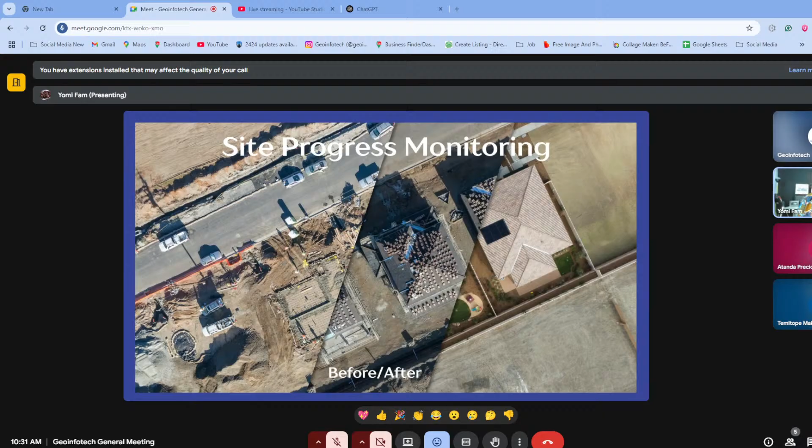What we were doing last week, this is what we're doing today. Oh shit, where did it stop? It's just showing a video of 46 minutes 46 seconds. We are live back, if so we know we can start. Why did it stop? Unavailable?

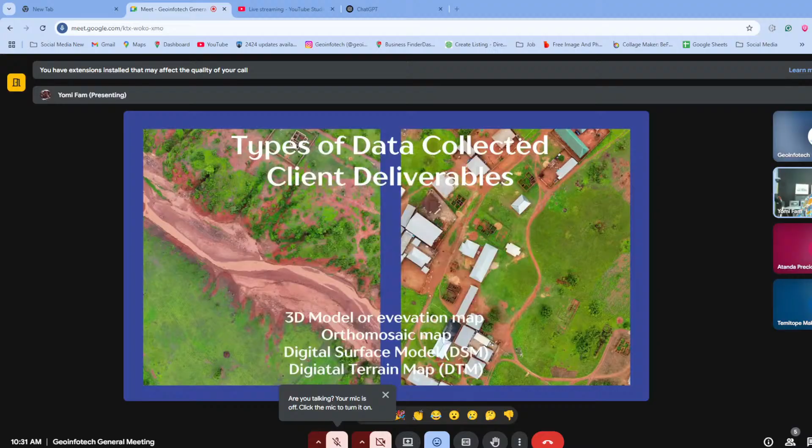What should we do? I think you should just maybe answer. Can you hear me? Maybe we can start from the beginning. Can you hear me? Shut up. Maybe what we're going to do first is first.

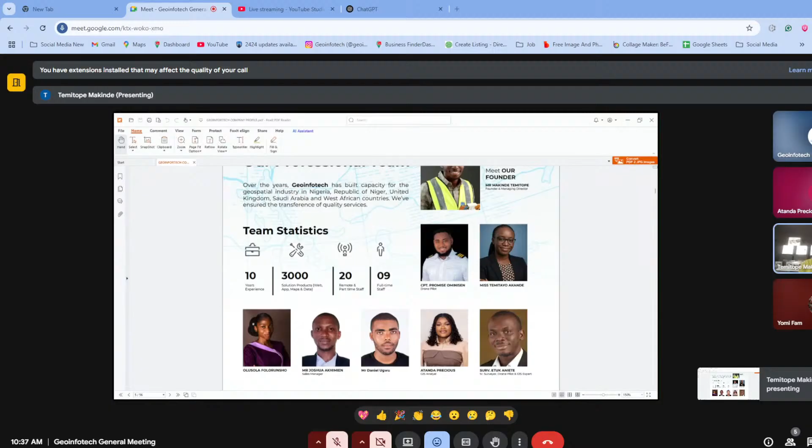So what we'll be diving into is drone data in the mining sector and also in the construction sector. As we all know, Geoinfotech Resources Limited, we are in Nigeria, Lagos, and Abuja. One of our core responsibilities is providing quality services in every one of our sectors, and we also offer services in different sectors, like in the drone surveying sector, in the mining sector, in the agricultural sector, in the real estate sector, urban planning, all different sectors.

I'll just use this opportunity to introduce Geoinfotech to you as an industry leader in this sector, in the geospatial and drone technology deployment. We provide state-of-the-art solutions with drone technology, geodatabase for several agencies, satellite data acquisition, and modeling of drone data and bathymetry data sets. And we provide a broad range of high-level geographic information system and remote sensing services.

Some of our prominent and prestigious clients are here with us also. I believe we will also have you with us and get to know more about you, and you get to know more about us in this webinar. In this webinar, we'll be diving into a lot of stuff that you're going to be learning. I'm going to put you through some of the things you're going to learn from us in this sector.

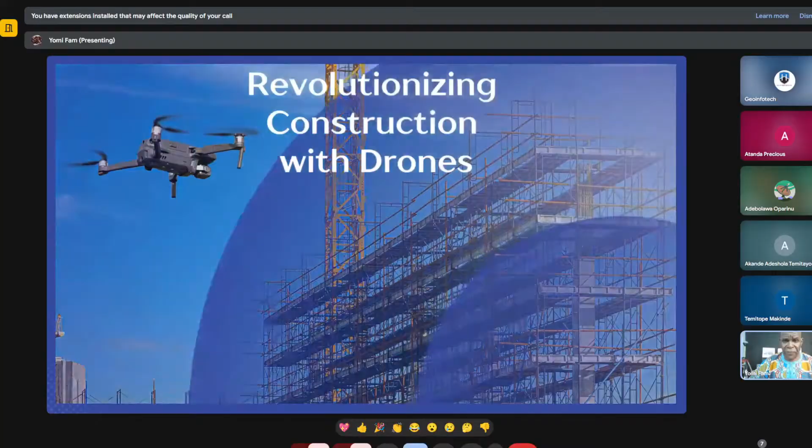Okay, so basically here we have a slide of someone sitting in his office with a cup of coffee and what looks like a pastry. So what if you could inspect your entire site without stepping foot on it? That's every investor's dream, or every site manager's dream. Sit back, the drone flight is being sent to you live, and you can just basically see what's going on site.

So what kind of challenges do we face in construction in Nigeria? Very limited visibility of site progress. There are always delays, most times there are delays and cost overruns. There's safety risks on site, there's difficulty tracking material usage. Drones can help fix all this, and we'll be going over a few of those challenges and see where the drones can actually come in and help out.

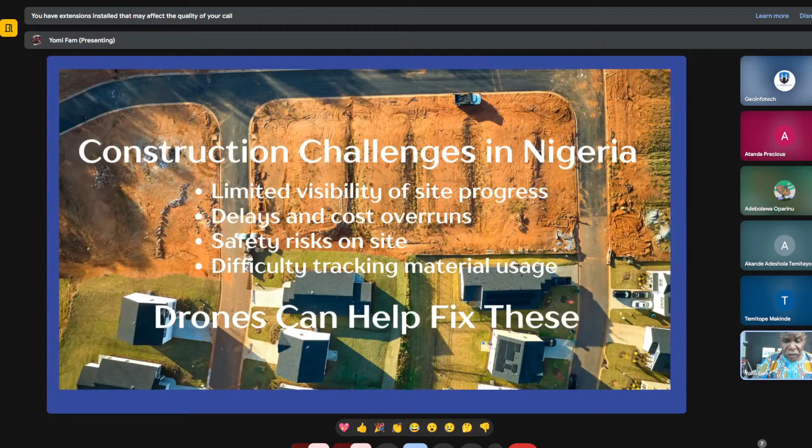Drones are basically your eyes in the sky. What are drones? Drones are also known as UAVs, unmanned aerial vehicles. They capture high-resolution images and videos. They fly autonomously or manually. What I mean by autonomously is you sit in your office, using apps like DroneDeploy or Pix4D, map your mission, preview it before you get to the site. Get to the site, put your drone up in the air, and the drone will automatically or autonomously fly the mission for you.

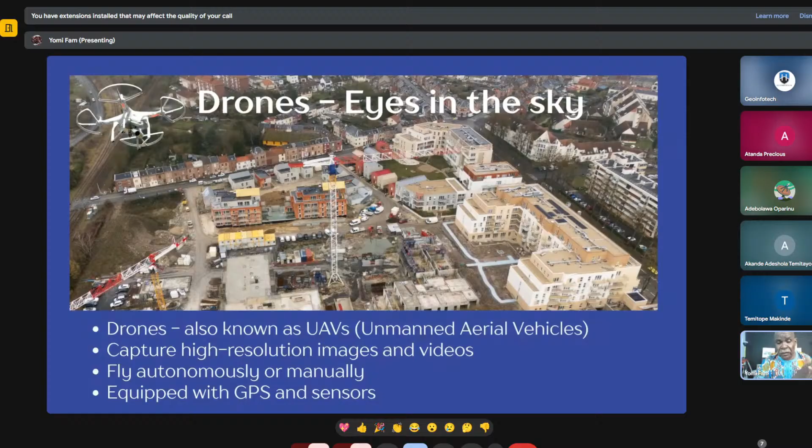But having said that, it's also very important that you manually know how to fly a drone, just in case when you get to the site things change and your autonomous mission plan missed a few shots. So while you're on site, you can go back and capture shots of those images that were missed, that's where the manual thing comes into play. Drones are equipped with GPS and highly sensitive sensors.

Drones are basically your eyes in the sky. I don't know how else you can get a view from that high out.

Where do drones fit in the construction site life cycle? You can have daily, weekly, and monthly site monitoring. You can do topographic surveys. You can take progress photos and generate 3D models. You can do site surveying and planning.

You can monitor the progress on the site as construction goes on, and do material management. What do I mean by material management? Basically, on the site, one of your contractors says he delivered 10 truckloads of gravel or sand, but he only delivered 9, or each truck wasn't full.

It was like 90% full. Well, the drone is up there. You just have to make sure that when he delivers the gravel or the sand, the drone's taking a picture of what's being delivered. You could also take stockpiles after he's dropped off the commodity on the site.

You could also do centimeter precision measurements of, okay, this pile here yesterday was what, 2 tons worth of material. Today, something's been used, it's now 1.5. You can do that kind of material monitoring, watching what's going on the site.

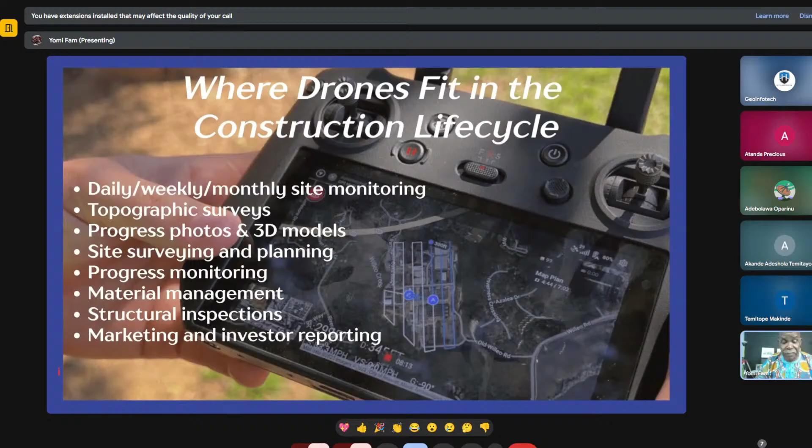You could also use the shots and deliverables to show the investors, okay, we said in 2 weeks' time we're going to get to stage B of the plan or the building, and you could show the investor, yes, we're on time. And if you're not on time, you could always explain to the investor why.

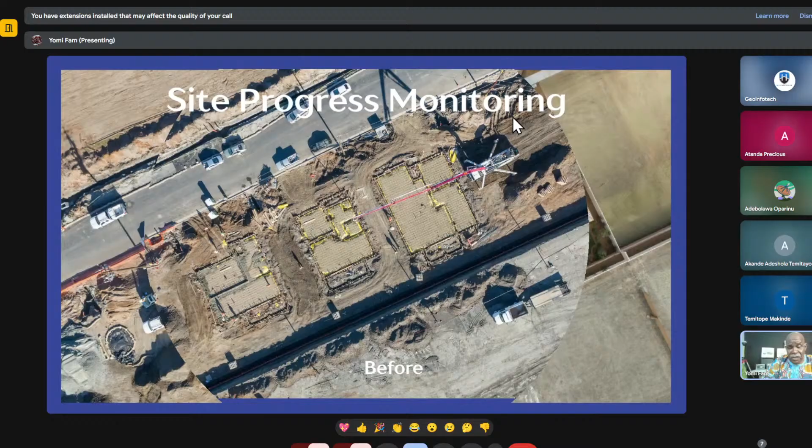One important thing you could do is site progress monitoring. As you can see on the slide, this is a drone taking a shot of, looks like the foundation has been laid. This is a before picture that you can show your team or the investor or whoever needs to see what's going on site.

You could also use the pictures and put them side to side, showing the before and where you're at in the construction stage. It comes in very handy.

Okay, 2 weeks ago, you had the left half of the construction. 2 weeks later, you're here. So it gives everybody peace of mind that the site manager or architect or structural engineer is following through on what they promised.

Next, why use drones in construction? Key benefits: speed, safety, and accuracy. You get faster and more accurate surveys, improved safety monitoring, visual reporting for clients, and lower labor and inspection costs. Very important for investors. If you can lower your labor cost and your inspection costs, so be it.

Now, I know for a fact that sometimes with these really large projects, maybe the owner of the building hasn't come out of pocket himself, meaning maybe he's gone to a bank to get a loan. Now most times, maybe not so much in Nigeria, the money is released in tranches. In other words, one week you say you're going to do X, Y, Z on the site, and they will not release more money to you until you prove that you've completed that first part.

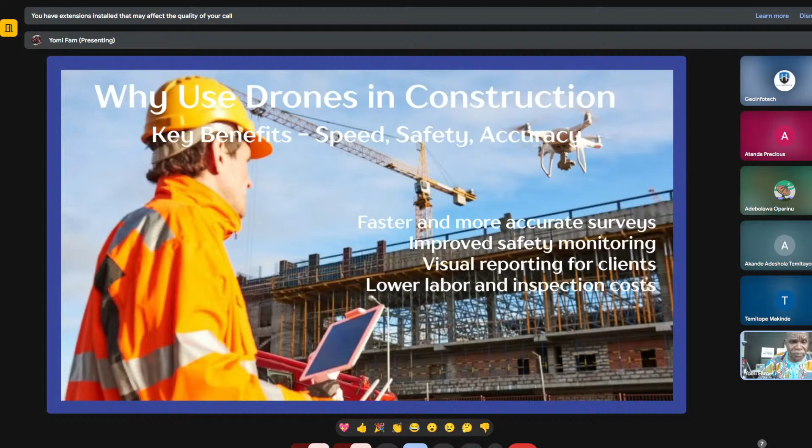Next slide, benefits of drone surveys. I'm just going to read through the list, they're pretty self-explanatory. They are completed by professional building surveyors who are trained in building pathology. They capture detailed imagery of otherwise inaccessible locations. You get closer to the survey target, which improves the quality and density of scan. Completion is faster due to ease of access. They reduce health and safety risks.

Very important, no plant shutdowns are required for a drone survey. Most of the drones, although sometimes you have to get permission from the client and let them know you're going to be flying your drone over people. But the law does say that as long as you don't have a sustained flight over people, you're good to go. You could do that while people are working, as long as they give you permission and let them know what you're doing. They provide a more thorough overview of a site, don't need any explanation there. They are more cost-effective than traditional surveys, definitely.

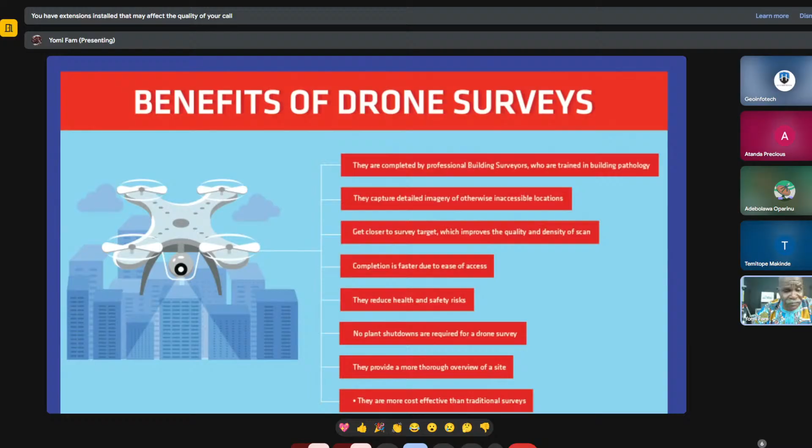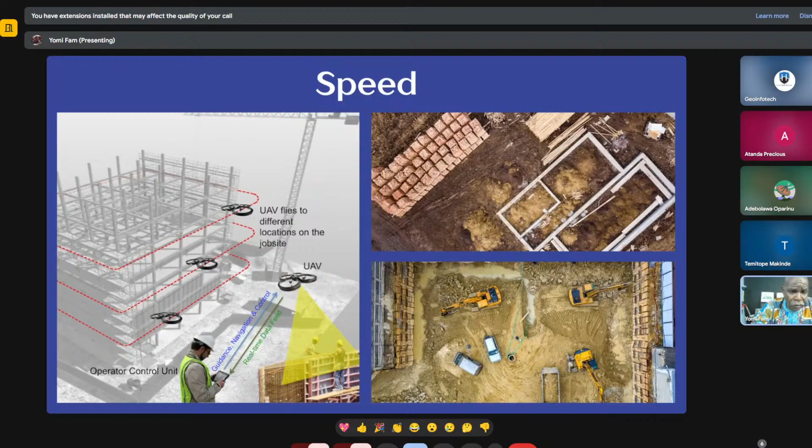Next slide shows speed. On the left-hand side we see a picture of a drone going around a building. At the bottom of that slide you have the operator with a remote controller. Whatever he's looking at, he's watching exactly what the drone is doing. He uses the controller to guide the drone if he's flying manually, or autonomously. If he's flying manually, that's when he takes more control of whatever the drone is doing. The drone in real time is feeding him data, so he can see exactly what the drone is doing. On the right-hand side, it's basically looking up from the sky, or from a drone, at what's going on at a site.

Here we go, safety, big issue. Now on most of these sites you've got to have your hard hat on, got to be wearing one of these funny looking jackets, got to have your safety boots on, because God forbid there could be accidents on site. If you have a drone up there taking shots as the construction goes on, you can see everybody on site has a hard hat on, which is very important. If someone falls, or a brick falls on someone, at least you're covered in the sense that all my workers are well equipped, they're covered, wearing the right safety gear.

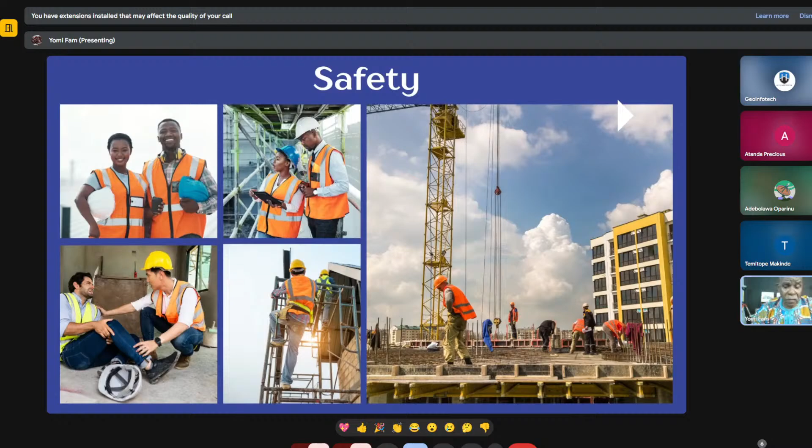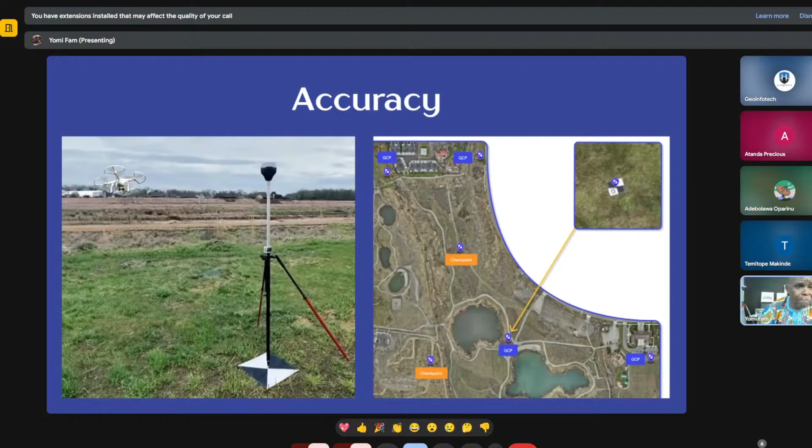There we are. Now, this is what they did on Niger State. They took all these maps, put it into the right processing software, and came up with this, which is going to be submitted to the authorities so that when they're planning in the future... a lot of homes got damaged, a lot of homes and lives were lost. So the authorities or whoever's going to develop this place can now take these maps and say, okay, water flows this way, this is where we're going to do our design, or this is how we're going to design the site in the future.

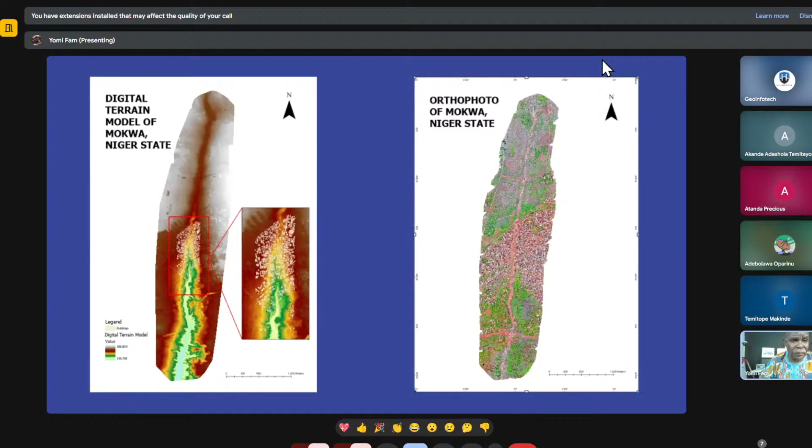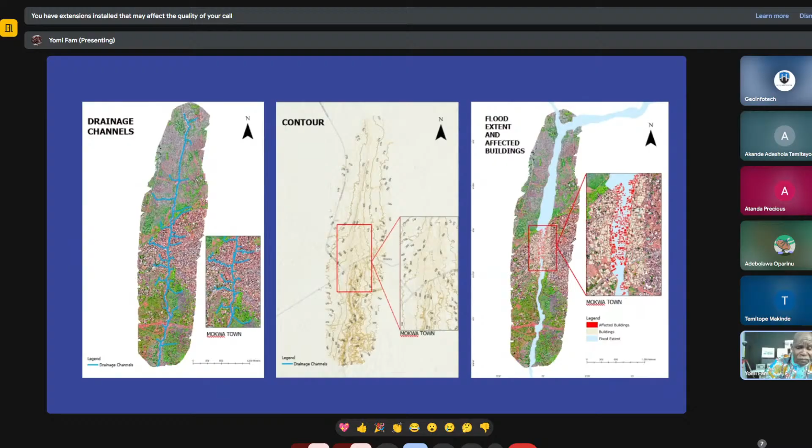Mostly contour maps are for surveyors. It just shows different elevations. Again, what GeoInfotech did on the right-hand side is they showed basically all the buildings that were affected by the floods.

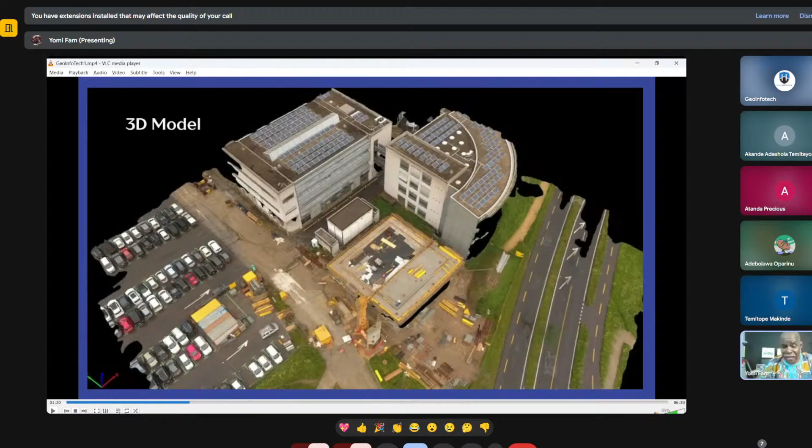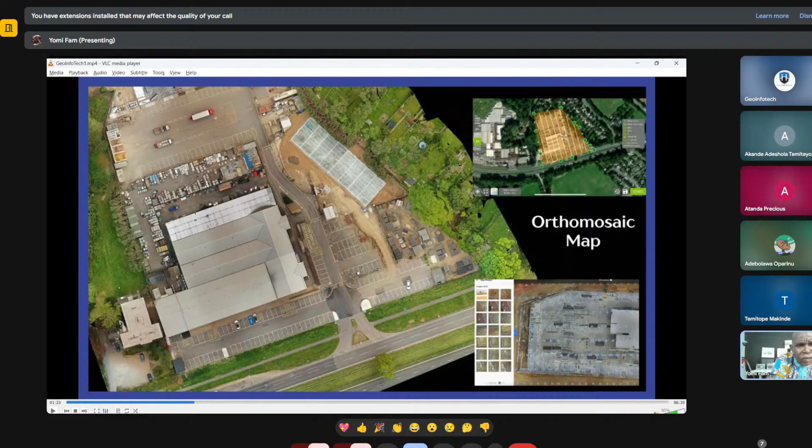If you look at the bottom corner, no, let's go to the top. The top part of the slide shows the mission plan. Again, I think I've spoken to you about what a mission plan is. The bottom right shows where all the photos were taken. Those little blue dots are where images were captured by the drone.

At the end of the day, depending on how detailed your client wants your orthomosaic map to be, you're going to get several photos like the ones on the left. The ones GeoInfotech did a couple of weeks ago for the Niger State, they did in excess of 400 photos, and all those photos had to be stitched together, and that's how they were able to come up with their maps.

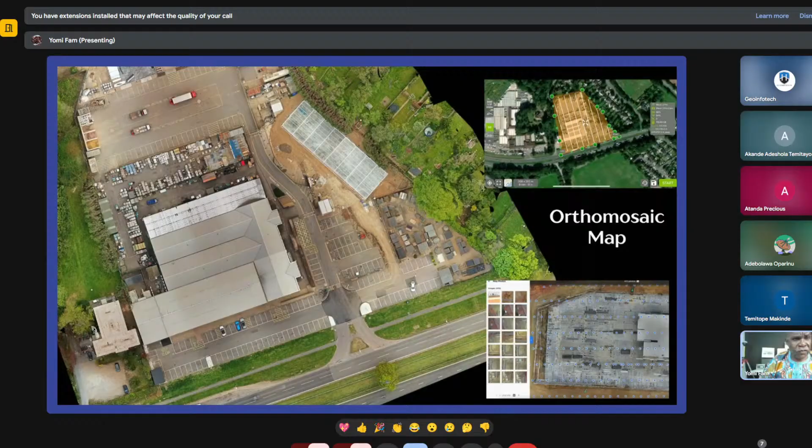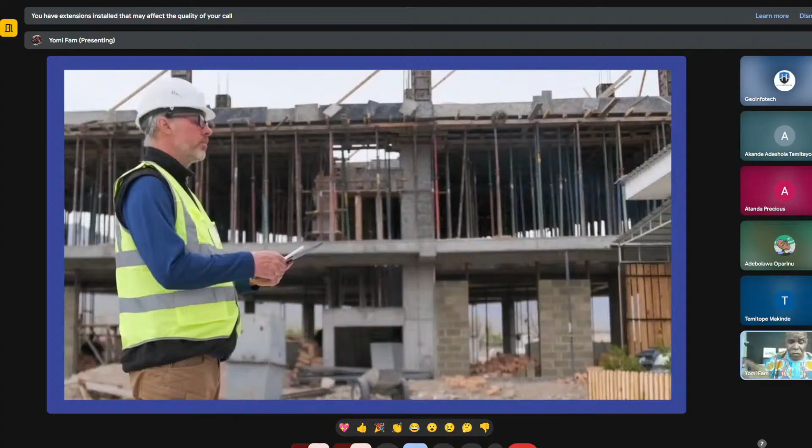So basically, this picture here practically doesn't have anything to do with drones, but just watch. This is a guy on the site, and what is he doing? He's taking notes, old school guy taking notes. But watch his face at the end of the clip, that doesn't look like somebody that's too happy about what he's doing. I am yet to find a drone pilot that doesn't have a smile on his face, because it's not easy work, but it's enjoyable because you can actually see the fruit of your labor. This guy here, oh no, I won't want him to be my site manager.

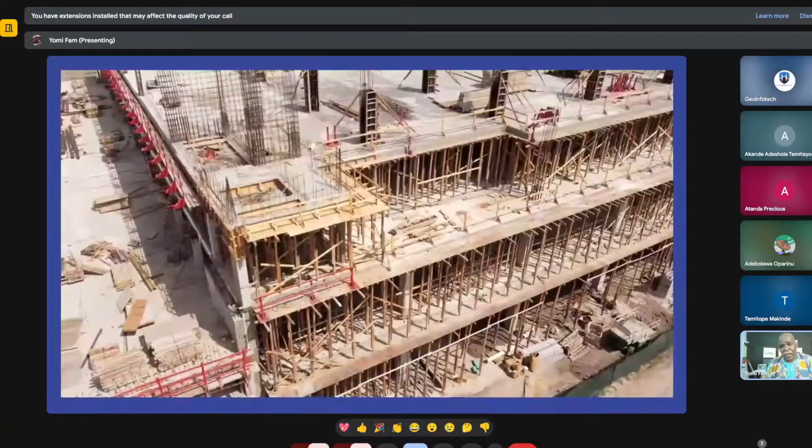So moving right along, basically we're just showing drone shots of construction sites. Now, I don't expect all your sites to be this large, but who knows? With GeoInfotech behind you, that's bingo, you can do everything.

This is a site from, here you practically see sand or gravel or sand piles. Now, if you're using the GCPs, or you're using the RTK drones with the RTK modules on them, you can actually take stockpiles of all that stuff there. So your site manager says, oh man, we're running out of sand, or we used up half of the sand that we need for the site. You can always go back to some of the progress reports or some of the progress pictures that were taken when this stuff was delivered.

One week later, there's only 50% left. What exactly did you do with the 50% of the stuff that you claim you used? Those kind of questions.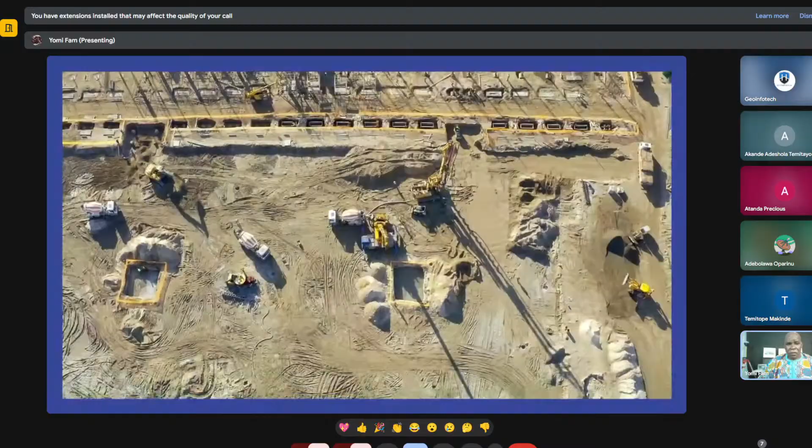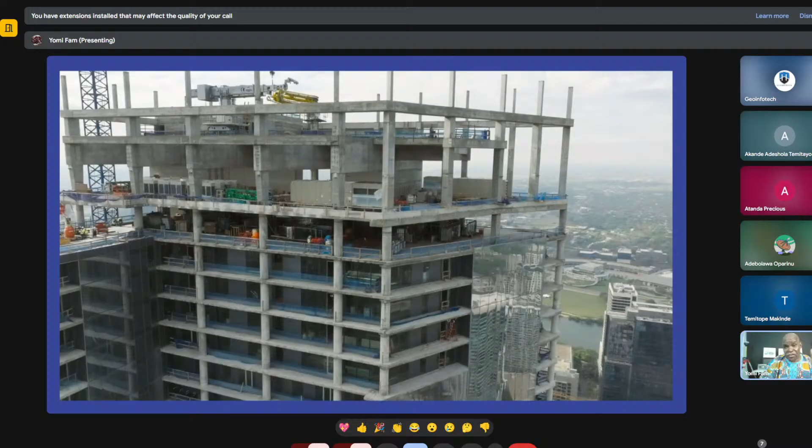So that's basically showing what's on site, the pre-construction. They've already started laying out some slabs here. This is another big one. I don't know if you could imagine monitoring a site like this, having individuals, I don't know how you would do it. Well, you might have to, if your company is rich enough, get a helicopter to take these shots. But basically, with drones, you could do anything. It's basically zooming in and going around and showing you what's going on.

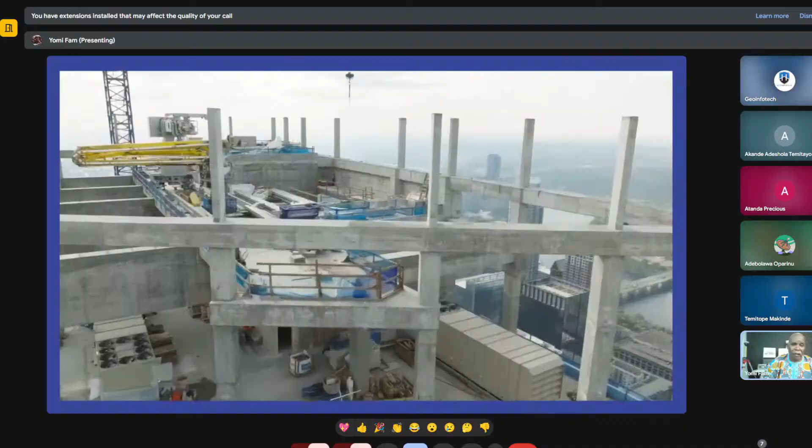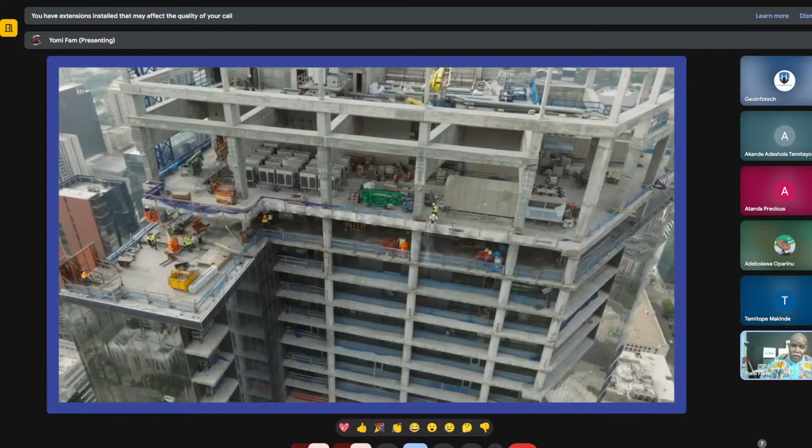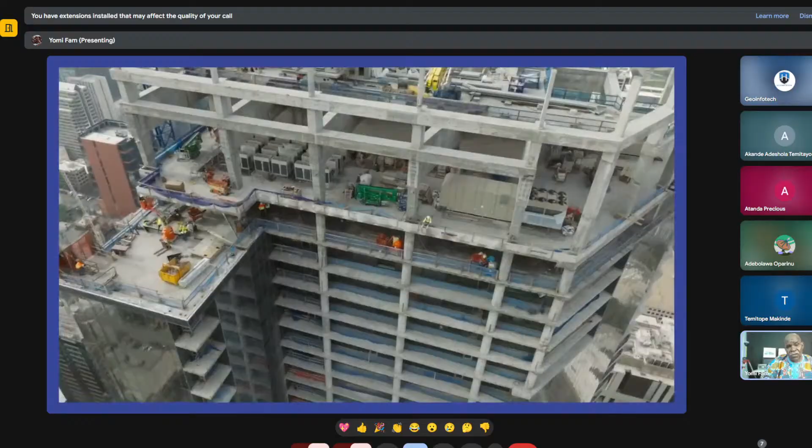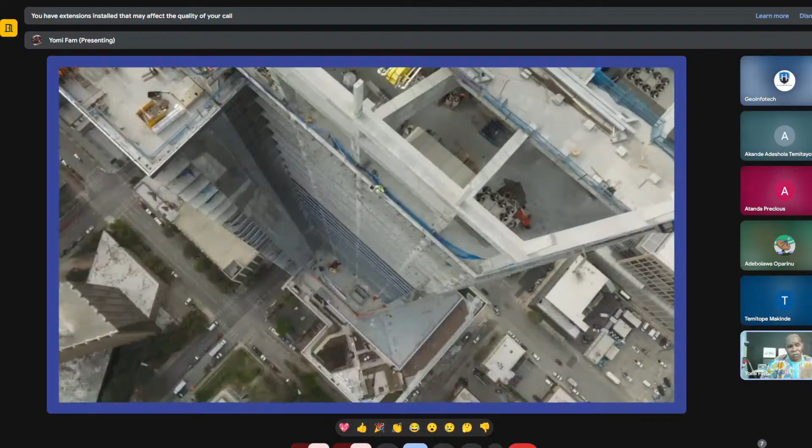Isn't that a beautiful shot of what these drones do? Here you can see what's going on. We're taking shots of the exteriors of these construction sites. If you need to see what's going on inside, we could also do that at GeoInfotech. Lots of drone pilots only take shots of the outside of the building. We can also take shots of the inside, so you can make sure the pillars or columns or whatever structural stuff is placed right, the right width, and check that the AC units are placed right.

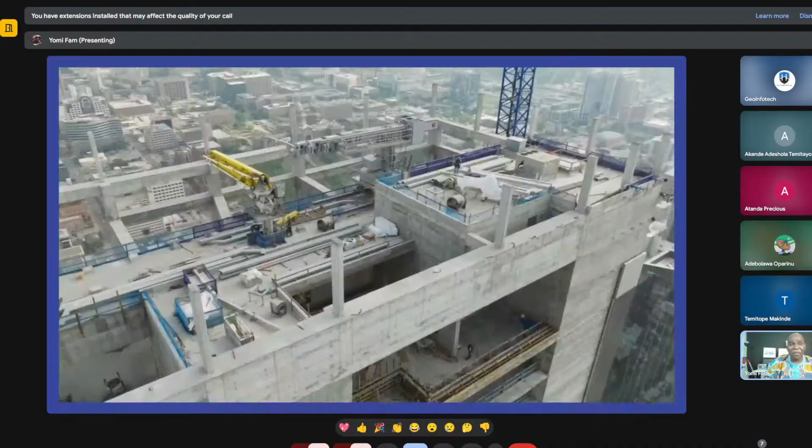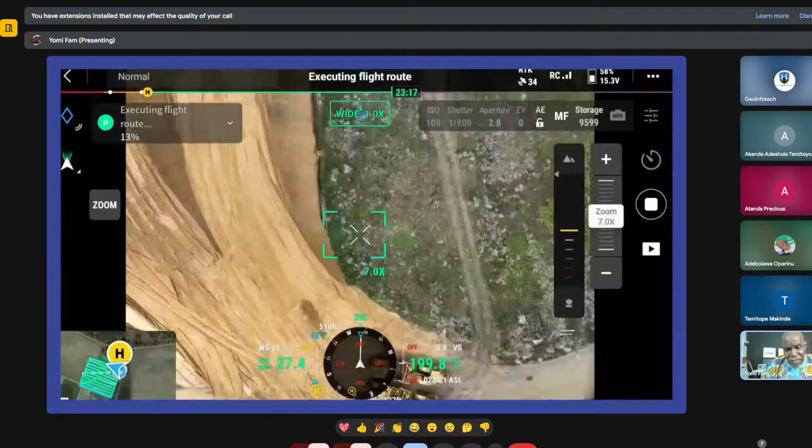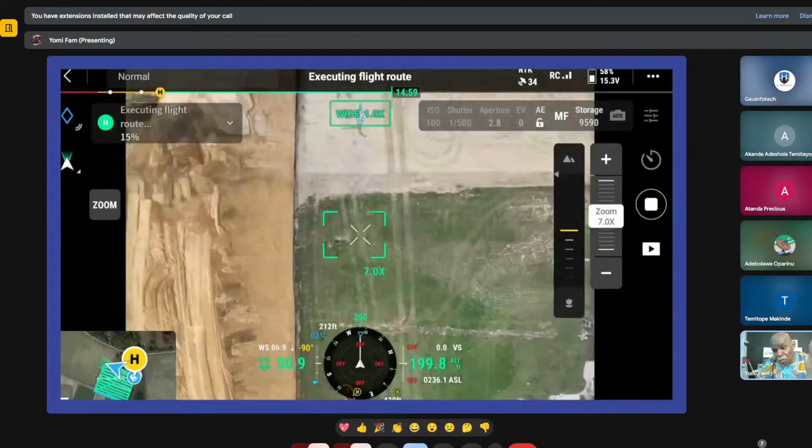This is a site, and I left the audio on this one because you can hear those clicking sounds. That's the drone taking pictures at precisely predetermined spots on the site. If you look at the bottom left corner, that's one of those mission maps you've already pre-planned. So you get out to the site, put the drone in the air, and watch what happens at the bottom left. The drone is taking pictures maybe every 1 second. As the drone turns, you see it's still following the pre-planned map and taking pictures along the way.

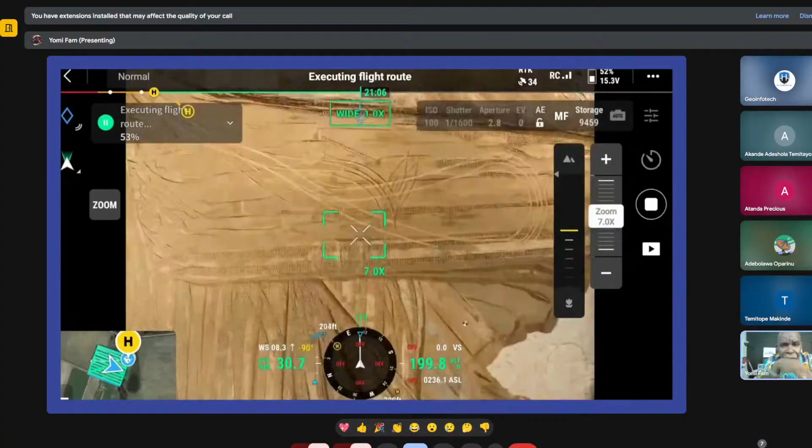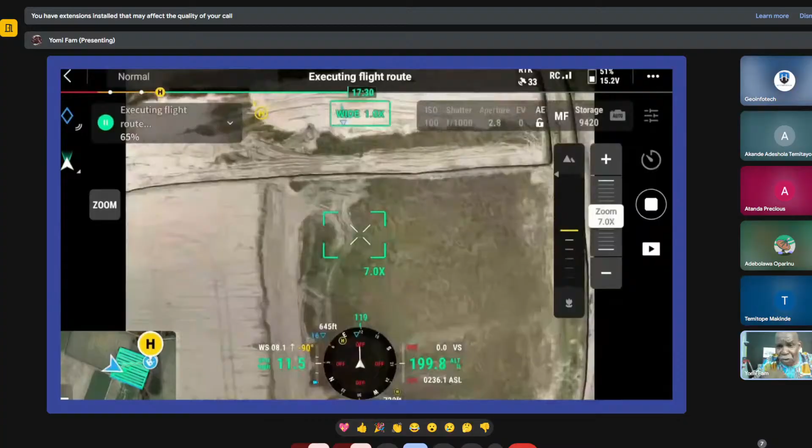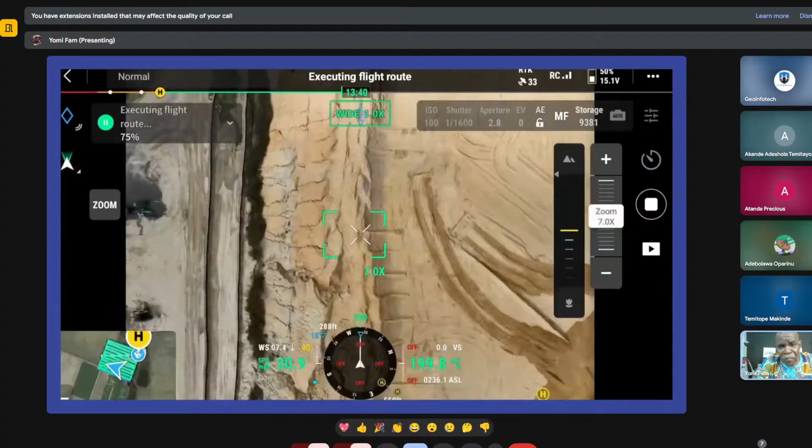I'm not going to finish all of this site, but as you can see, this software shows you how much of the pre-planned map it's completed. Right now it's at 57, 58%. So you can control everything going on in your data capture software. I fast forwarded it a bit so I didn't bore you with the whole 100%. We're at 66, it should be coming to a close. Look around the screen and you can see all the settings you preset on the drone, and as it moves, it's taking more pictures. I take my pictures every 2 seconds, but it's up to you - if you want to create 1,000 photos, that's up to you.

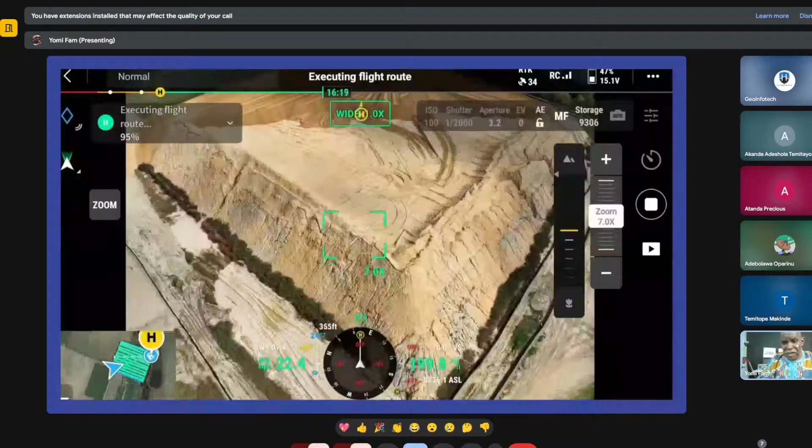I'm going to be rounding up in a minute, so I'll fast forward this a bit. We're almost done, we're almost there, it's coming to a close. We're at 95%, and at the end of the mission let's see what happens. 97, 98, 99. It's going to say something.

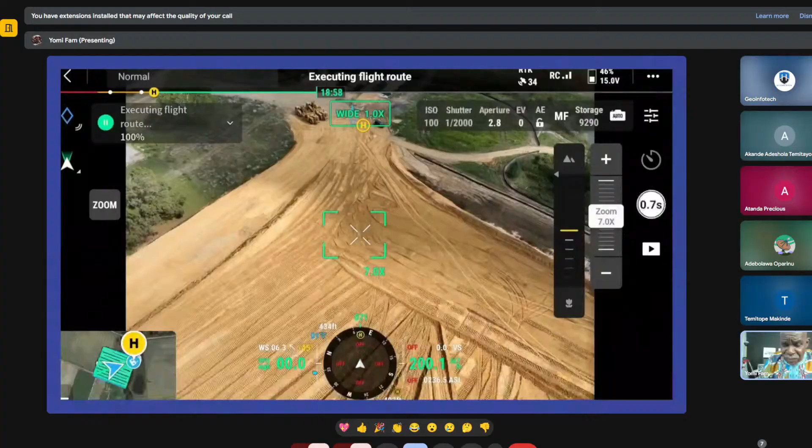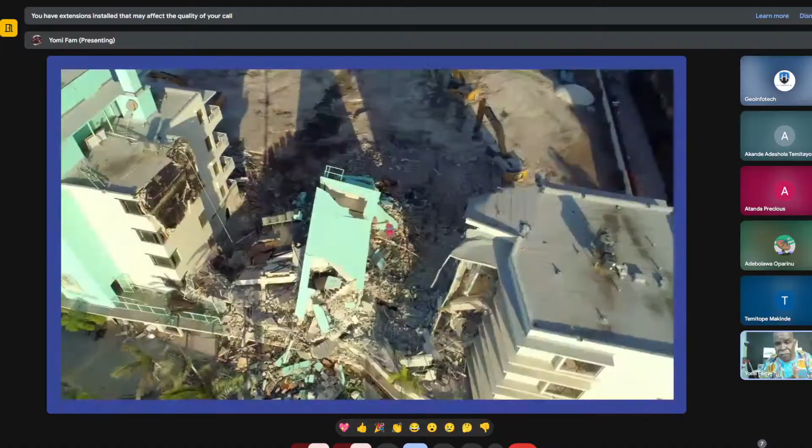There you go. Here is a site in California that was damaged by earthquake. They want to rebuild, and at the back of this collapsed building they want to put on some other structure. So your drones can go out there, determine what the damage was, and then report back to the developer on the extent of the damage. That's right by the ocean.

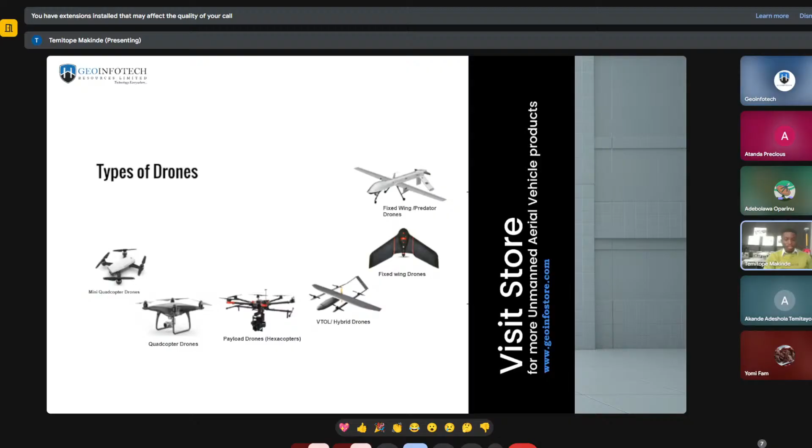And most importantly, we have the fixed wing drone, majorly used for long endurance surveys. You want to survey an entire site for like 2 hours, 1 hour, because it has only one rotor, while the quadcopter has about 4 rotors, so it exhausts the battery faster. Then we have drone and the sensor - this is where a lot of drones are used for different purposes, for different missions. We have the electro-optical camera, for high resolution visual. And we have the infrared, for heat signature. There was a time we were surveying a site just to detect areas that had a high level of heat signature.

You can't use that with the RGB, with normal photogrammetry we use. You need a different payload for that.

Then we have the multispectral sensor, although this is very good with agriculture areas, whereby you can check the health of the crop.

Then we have hyperspectral sensor. Hyperspectral sensor is not common, a lot of us don't really see that in markets. It provides spectral data for mineral identification, and this is some of the things we'll be diving into.

And we have LiDAR. LiDAR is best for detailed mapping, especially where we have forested environments, so that you can get the bare earth surface while you still have tree and vegetation cover at that area.

And we have synthetic aperture radar. This is majorly for rain, fog, and vegetation of wide area imaging.

They have GNSS. This is also a system embedded with the drone to ensure precision while capturing your data, so you don't have to capture data without precision. As you're capturing your data with the GNSS receiver, it gives you more accuracy to your data set.

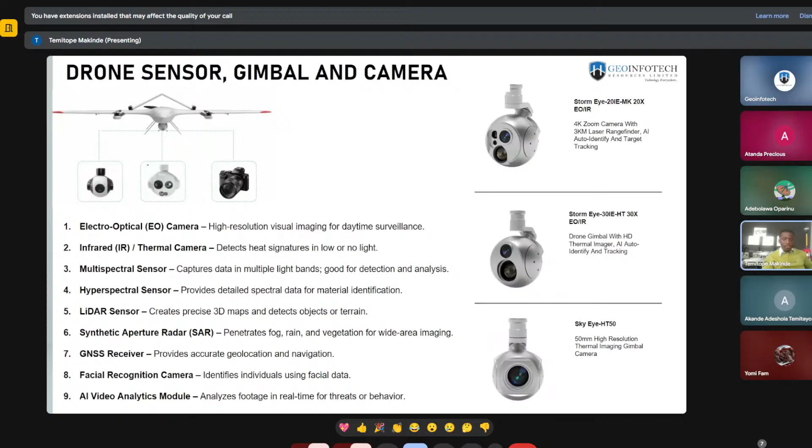And we have the AI video analytics module. We've recently seen it in the Matrix 40, which is bringing an AI system into the drone, whereby it makes the drone smarter. A lot of people are doing a lot of AI stuff, and this will actually increase the value of this hardware itself.

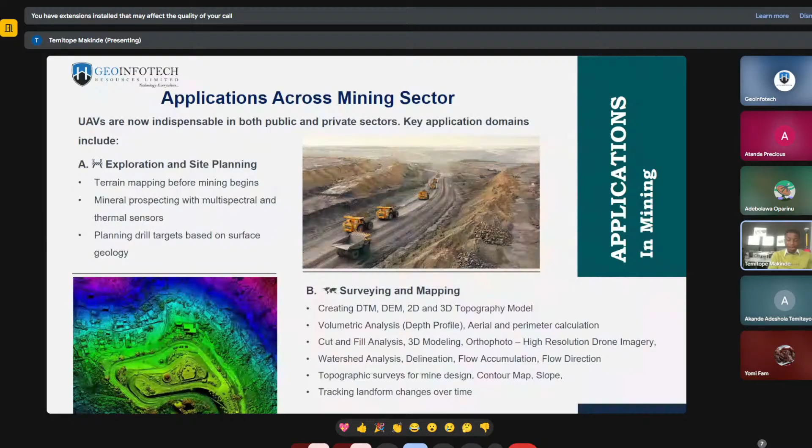Watershed analysis helps you understand the areas where water will flow to and where water will accumulate before planning a lot of things. So with this, you can understand the nature of that environment, make advantage of this nature, and also plan accordingly. You can also track landform changes over time.

Now we have stockpile and inventory management. This is one common part within the mining sector. You can see here we have previous data and previous calculations whereby we brought in past projects, processed these data sets, analyzed them, and calculated the volume of this pet coke you can see there. Pet coke is one of the raw materials commonly used for cement, and it's more like a waste product of petroleum. This is pet coke, and they use it in combination with other minerals to get other results.

So you can see here, without going to the field again or spending hours of time, just this data set can give you a lot of information, and you can see the analysis calculating the volume of these data sets. So you can measure stockpile volume accurately and frequently.

With this, you can know how much volume is remaining in stock, and know if you've not been cheated in the office. You can calculate this with just a simple tool like Pix4D. You can track inventory levels and reports, and also compare with logistics as well.

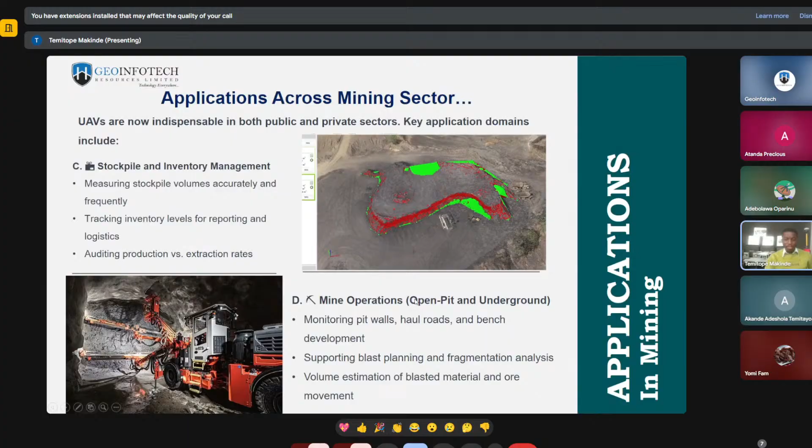Then we have mine operations. One thing about mine operations, especially underground, is that it has a high intensity for risk.

You can send a drone to survey the entire mine and also create a 3D model to understand the terrain before going in there. This allows you to monitor the pit walls, haul roads, and bench development. You can also support blast planning and fragmentation analysis, and calculate the volume estimation of blast materials and ore movements.

The next thing we have here is stockpile and inventory management. It's related to what we did before. You can use this for calculation of different inventory levels and also for auditing reports within the organization.

The next one is environmental monitoring and waste management. With this, you can inspect different cracks, seepage, and deformation, or monitor rehabilitation efforts and vegetation growth on site, and also study the water quality within that site.

A lot of things this drone can do for you without you being in physical contact with it. One important thing you'll notice is that you can get results equivalent to about 15 surveyors or 15 GIS field workers on site using just a drone.

Anytime you're flying a drone, you just need a co-pilot and a person in command, that's the main pilot, or the visual observer. You have a visual observer, a person in command who is the pilot, and maybe a person manipulating the control. So you have 3 guys capturing detailed information on site, and this is transformed into a digital copy or digital dataset that can be used for multiple results.

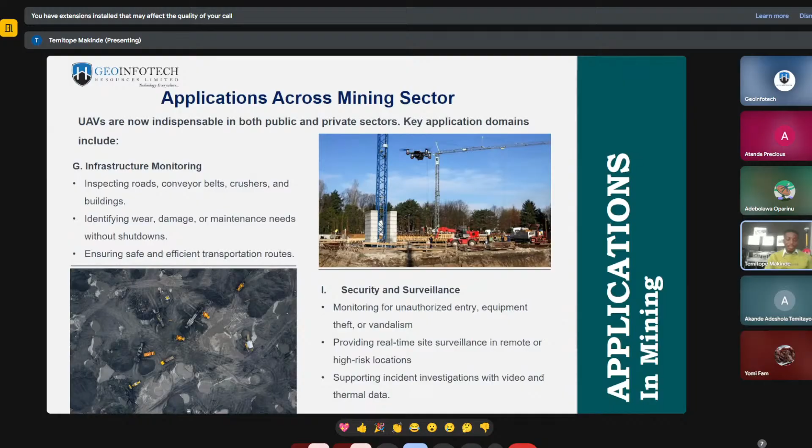We have a lot of drones at Geoinfotech: the Matrix 40, the Matrice 350, the Mavic 3 Enterprise, the Thermal, the Multispectral, and we also have the LiDAR. The LiDAR comes in place whereby you have to get detailed volume calculation, especially when doing 3D modeling. The LiDAR is very useful in that aspect.

Then this is the last one, which is safety and risk management. In safety and risk management, you are limited to where you can reach, especially when engaging in the mining sector. It's just like masts - you see a lot of people climbing masts just to inspect a wire that is not connected properly. But with a drone, you can just send it up there with a very good camera resolution.

And it can zoom - it's not all drones that can zoom, so you should know this. There are drones built for a specific purpose. Drones that can zoom are mostly for inspection. Drones with automatic and manual focus and automatic shutter are very good for mapping, and also embedded with GNSS and RTK, they are very good for mapping. You have a lot of them like that.

But a lot of people get confused. You get a drone that you see people using for content creation, and you also want to use that for mapping. You're not just endangering your drone, but you're lacking - you're lacking quality.

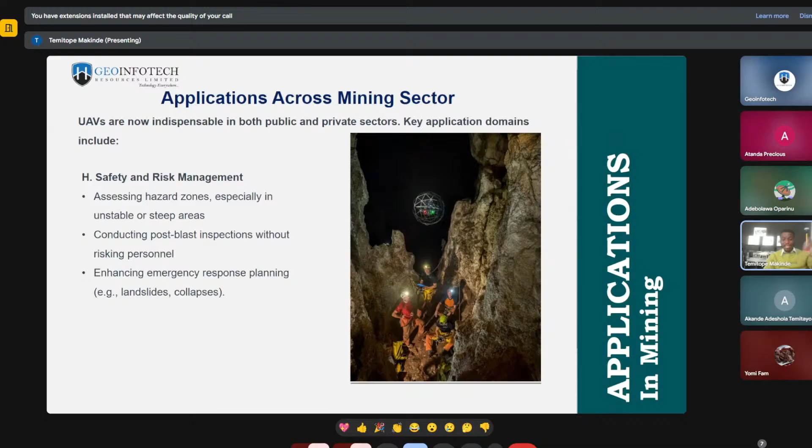The results and reports you get from that drone will reduce in quality. For health, safety, and risk management, you can send this drone out there, especially in small holes or big holes, before you go in to inspect, just to be sure it is safe before you go there.

We have technical teams, especially when going to sites. This is for those operating a drone department. You should always have a drone pilot and a security team. It's not everywhere you go that you just assume the drone pilot is safe with the drone, that so far he has the drone with him, he's safe. You should always have a drone pilot with a security team, a technical support engineer in case of any glitch on site, a compliance and safety officer, and security and operations managers.

We also have other teams at Geoinfotech, including data analysts and GIS specialists, command operators, drone maintainers, and IT and network administrators. We also have security operators, managers, and emergency response personnel.

Now let me tell you the areas you can fly and areas you cannot fly. In Nigeria, especially if you're familiar with DJI, there are areas you can't actually operate this drone. This is embedded in the DJI store, that you can't fly in restricted zones, especially close to an airport. So anytime you're flying, always make sure you check the map, check the areas you're flying, and be sure you are safe to fly within those regions.

You're also not allowed to fly at military zones, government buildings, or villages without warning, especially airports, power plants, and prisons. So as much as drones are useful in this sector, there are some areas you are not meant to fly. Even if you are going to fly a drone there, you should let the people around know that you are coming to fly.

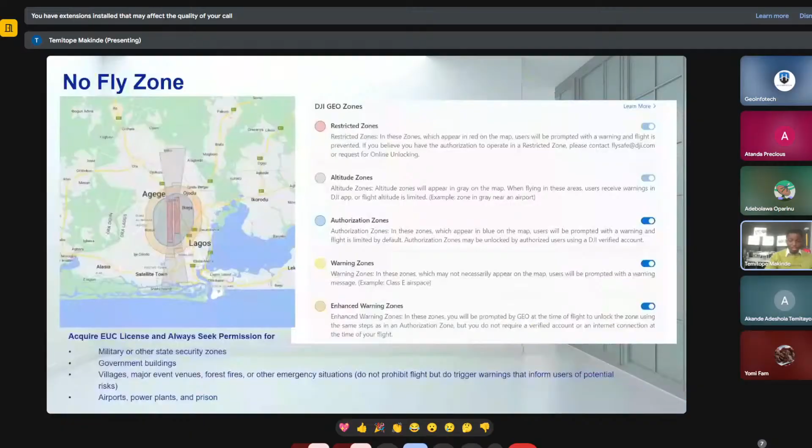If the weather is good, you should also know the tallest building or tallest object around there, for safety. You should also check if there is any prison, police post, army barracks, and so on. Trust me, you don't want to get your drone into trouble with those guys. So you should do a lot of checking, and a lot of maintenance with your drone is very important.

Check your drone, and one last thing, check the camera settings. Trust me, you can go ahead and fly your drone, but you might be flying without checking the settings, wasting a lot of time. What we're bringing to you is time management, cost savings, and quality results. So before flying, check your drone hardware, check the settings, check the environment, that's your reconnaissance survey, check the environment at which you want to fly. This gives you an idea of the tallest building around there, so you know the altitude at which you're flying.

You can also check the environment for any airport or helipad nearby, and make sure you alert the aviation authorities. They will guide you.

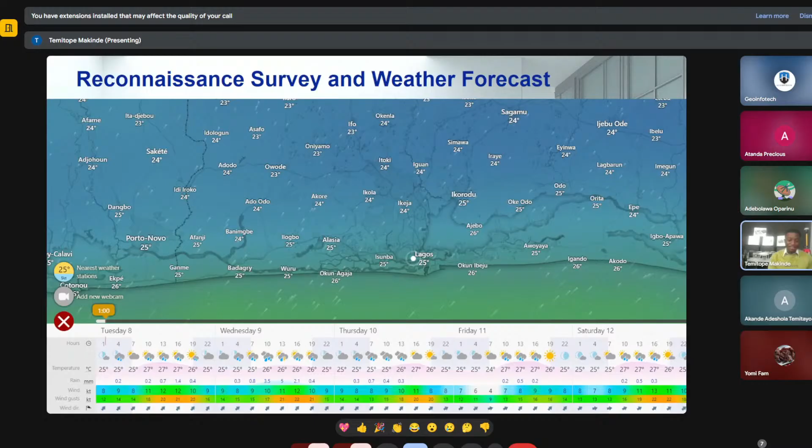If you're having any issues with your drone, trust me, make sure you get a drone with return to home functionality. There are a lot of drones out there without this. Get a drone with return to home.

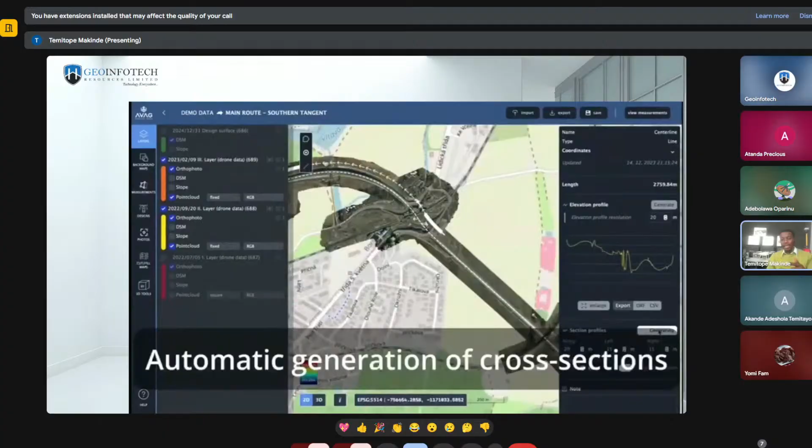This is one analysis you can implement and overlay on Google Maps or other software to get an idea, showing a setback within a particular route. I'll be displaying some of the results we got.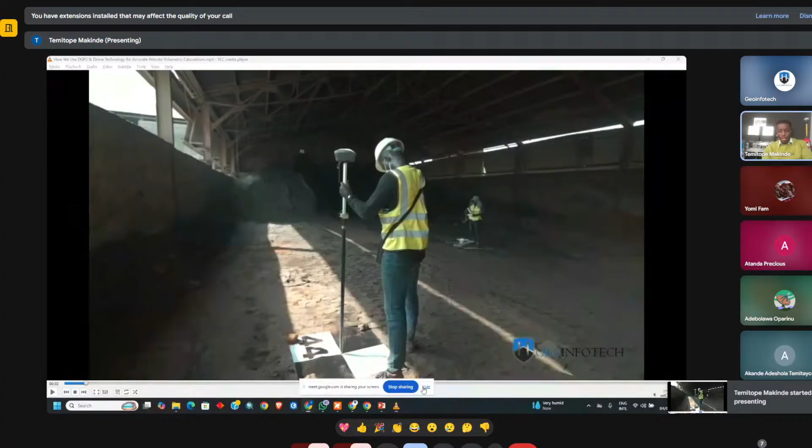This was done recently with a drone. Most people find a lot of difficulty when surveying indoor, and this is us trying to survey indoor on a site.

The challenge we faced here was a lot. This was us flying the Phantom, and this was the results. The result actually came out well — we were able to calculate the volume of this material indoor.

Trust me, you can't do this with just a drone and differential GPS. The trick is we have to use a total station. You can't do this with just a drone and a differential GPS.

When doing this, you have to get something like a total station. Let me play this — sorry for the glitch you're seeing there.

This was us trying to calculate indoor. We were able to delete some of the other data that are not necessary, like the sidewalls and other things around it, so we could calculate the volume without just measuring it manually.

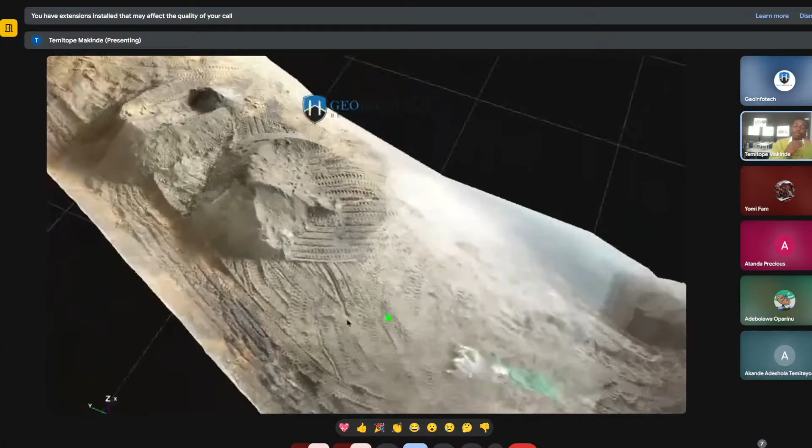But another thing is the more GCPs, or points you pick on site with your drone data, the more accurate your results will be.

We used a surveying drone with a total station, and also a bit of differential GPS to ensure accuracy and validation of the data sets. With other photogrammetry and remote sensing software, we were able to calculate what we got here.

I think this is for construction. Let me see if I can clear this up.

For every project you survey on site, there are a lot of results you get. You don't just go ahead and get your orthophoto, your DEM, your contour — you might also get the pipelines, current features, manholes, routes, footpaths, and all of that to understand the full terrain of the site.

Note that for most construction sites, the results you get are sent to town planners, developers, or architects to be able to plan the site according to its use.

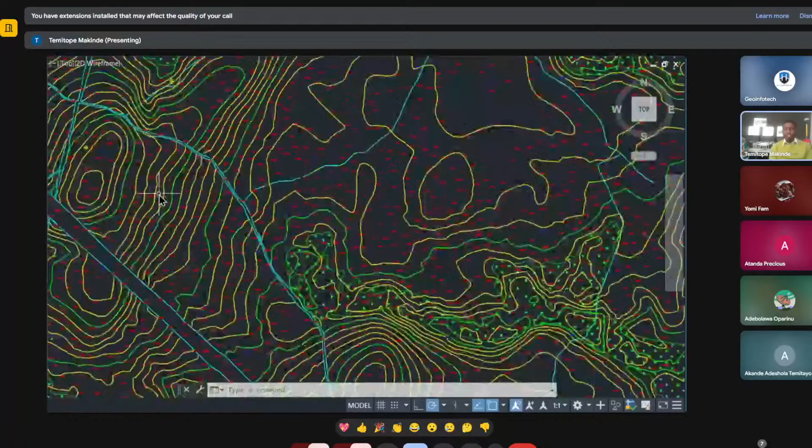This is for construction, where we're able to get the topography. This was about 1,000 to 2,000 hectares of land surveyed within less than a week.

We try to maintain accuracy, especially with the pixel, and also with the GCPs we're picking on site. There's accuracy for vertical and horizontal measurements, and we try to maintain less than 3 centimeters.

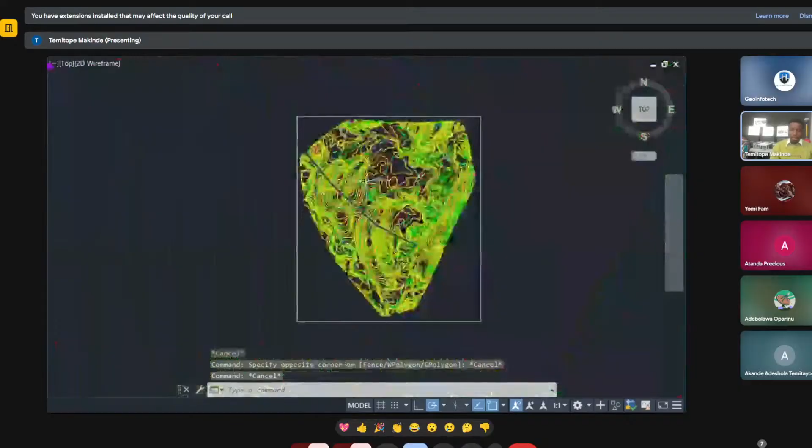You can see there are multiple factors, multiple layers here. We have the contour, the GCP XYZ data, and the river parts as well.

So you should maximize the use of your drone on site. You don't just capture this — you can also extract features through automatic rasterization or vectorization of the site to get footpaths, road networks, railway tracks, water bodies, rivers, and all of that.

This will help anybody trying to build a drainage system, and help with setting up residentials. This is also ideal for setting up hotels and other commercial activities around the site, giving you detailed information.

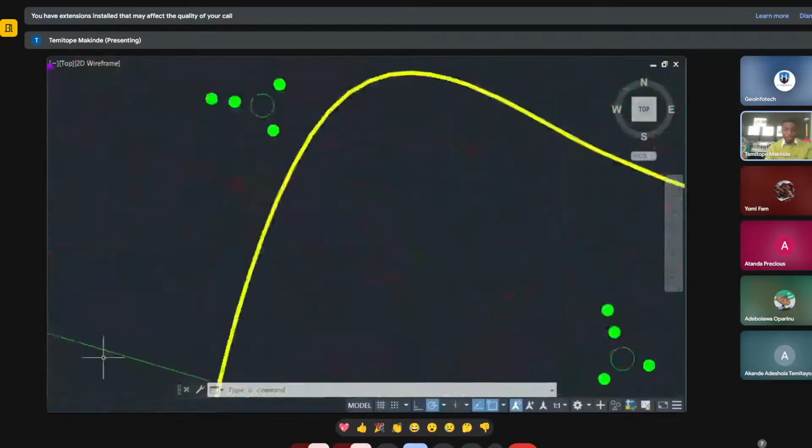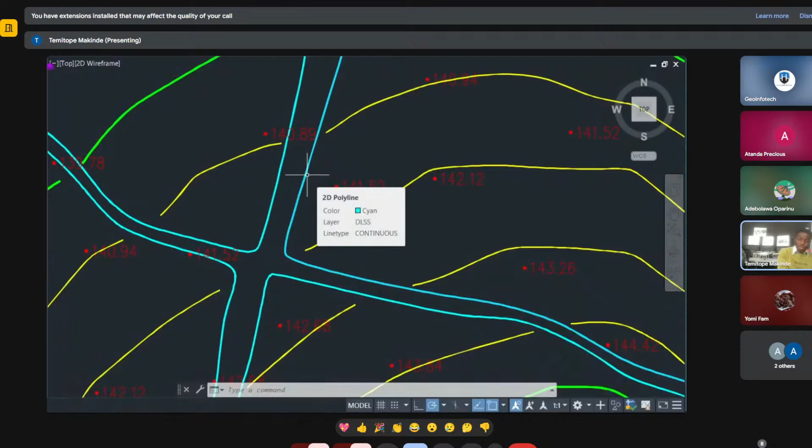Another thing that is most important within the drone industry that most people don't do is the classification of features. You can classify areas currently covered by vegetation, areas covered with existing settlements, areas with just roads, and areas with forests and light vegetation. That is what other remote sensing software can do for you.

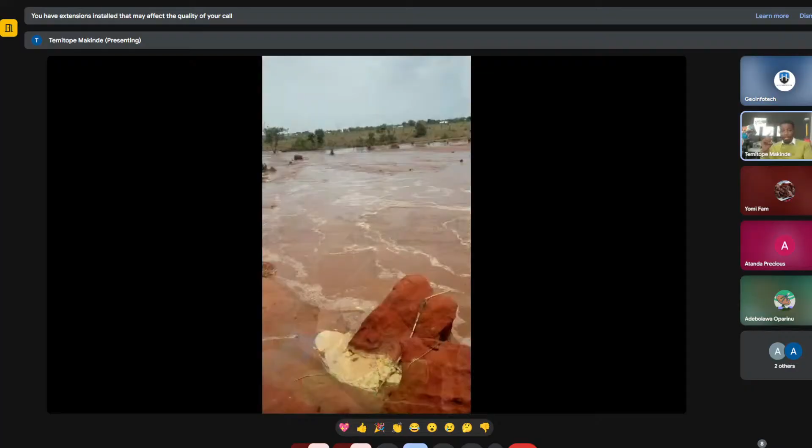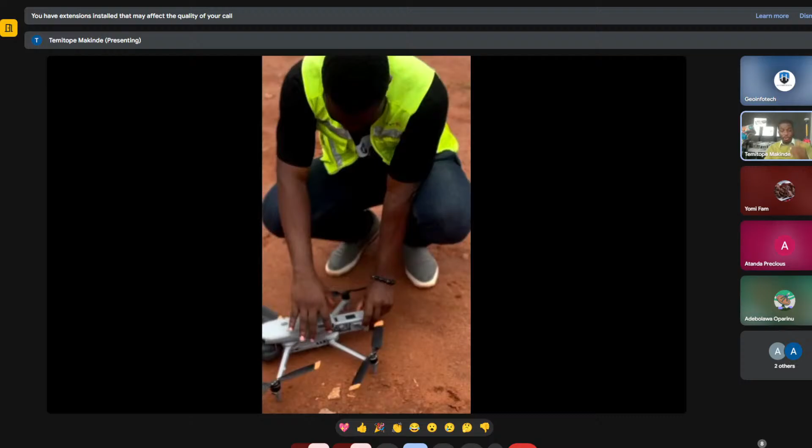During the course of this flood, we were able to observe that the water had accumulated because of the source of where this flood water was coming from. Let me pull this up just a minute... I'll be putting this up so you can understand this is a live project that happened recently—sorry for what happened at Mokwa.

This is more like a live project which Geoinfotech voluntarily took upon to survey, to understand the cause of the flood and the source of the flood. We were also able to survey and understand what the solution can be. So this is what GIS can do for you—it can give you before results and after results, and current results. I'll be sharing my screen for the results we got on site and some of the reports we got as well.